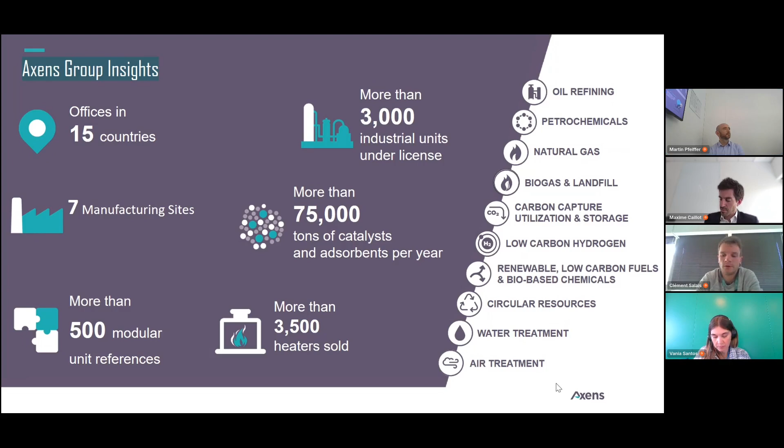Now let's jump to today's topic, which is the DMX process. Axens and IFPEN have been working on the development of this post-combustion carbon capture process using a cutting-edge solvent, which has the capability to demix under specific operating conditions of CO2 loading and temperature. The demixing is the separation of the solvent into two different phases: a CO2 lean phase and a CO2 rich phase. The CO2 lean phase will not contain the CO2, while the CO2 rich phase will contain most of the CO2. So now you understand the principle of the demixing.

Let's jump to the schematic on the left, which is the simplified PFD of the DMX technology. The flue gas which contains the CO2 that needs to be removed will enter an absorber countercurrent, and it will be in contact with a lean solvent, which will capture the CO2. At the top of the absorber, we have the treated gas from which the CO2 was removed, while at the bottom of the absorber, we have the rich solvent containing the CO2 that was captured.

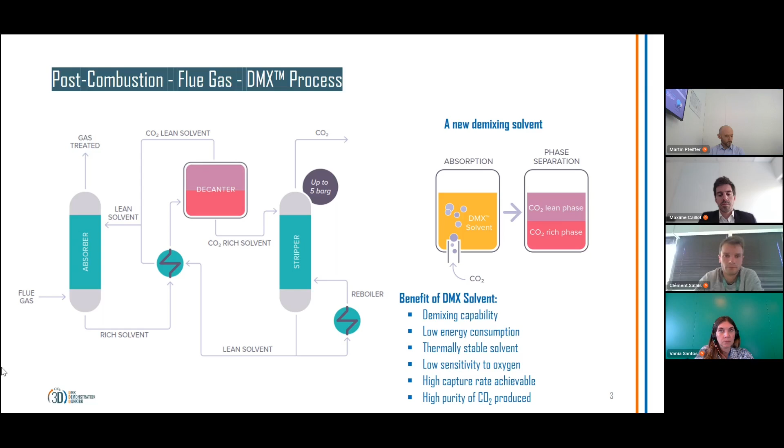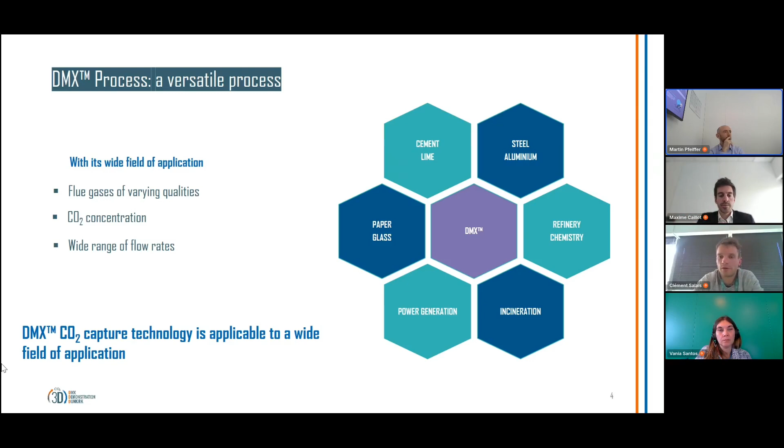The DMX process has been developed to be a versatile process, applicable to a wide field of applications with varying flue gas quality, a wide range of CO2 concentrations, and wide range of flue gas flow rates. So it can be applicable to many industries such as cement, lime, steel, aluminum, paper, power generation, and so on. In the end, DMX technology will be applicable to your own application, and you can see that the DMX process is applicable to any type of industry.

After this reminder about the DMX technology itself, let's move to the 3D project. As Thibaut mentioned, 3D stands for DMX Demonstrator in Dunkirk, and it's a project funded by the European Union. The purpose of this project is twofold. First is to demonstrate the technology itself, with the construction and operation of a demonstration unit, which has a capacity of 0.5 ton of CO2 capture per hour.

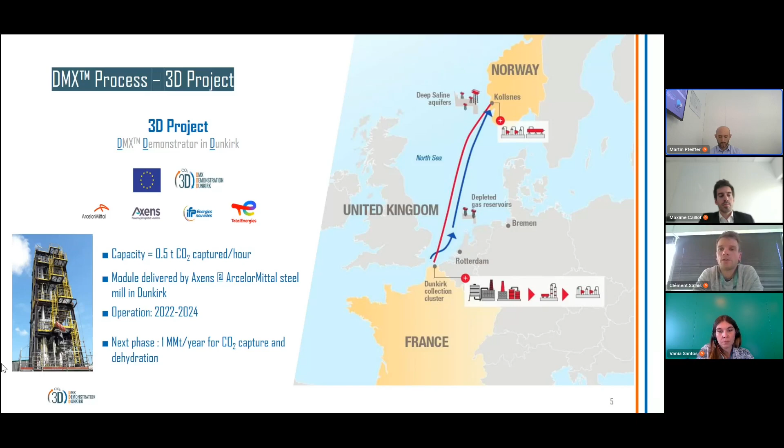This unit, which was delivered under module by Axens, is connected to ArcelorMittal's blast furnace gas network, and it's located in Dunkirk, in the steel mill factory of ArcelorMittal. This is the first objective, demonstration of the technology. The second objective is to perform a pre-feed of the complete CCS chain for a 1 million ton CO2 capture plant and CCS chain, from ArcelorMittal's emitting point toward the storage location in the North Sea.

So as I mentioned, the first objective of the 3D project is a demonstration of the DMX technology with construction and operation of this pilot plant. Construction started in 2019, and the pilot started up in 2022, and has been in operation for the last 2 years. It has a design capacity of 0.5 ton of CO2 per hour, and it will treat ArcelorMittal's blast furnace gas, with the possibility to tune the inlet CO2 concentration thanks to dedicated recycle lines.

The second objective is the pre-feed of a full carbon capture chain of 1 million ton CO2 capture per year. The first point will be to design a DMX unit for this 1 million ton CO2 capture per year capacity, which is what we call work package 3 later on. As part of this pre-feed, we also have heat recovery from the steel mill plant, CO2 conditioning and liquefaction, CO2 transport to the North Sea offshore storage location, and social acceptability of such a project.

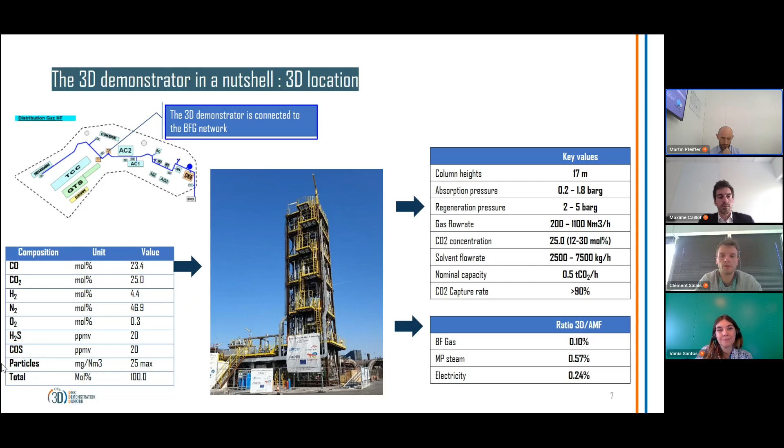The CO2 concentration as per design is 25%, but with some dedicated recycle lines, we can vary it between 12 and 30%. The solvent flow rate has a range between 2.5 and 7.5 tons per hour, and the nominal capacity of the plant is to capture 0.5 tons of CO2 per hour, with a capture rate higher than 90%.

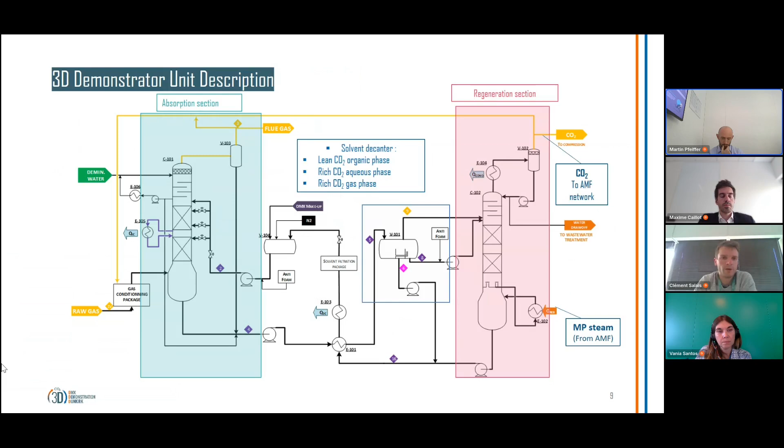Now let's go more in detail about the demonstrator itself. There are three main sections: the absorption section, where the flue gas is in contact with the lean solvent. This is where the absorption will take place.

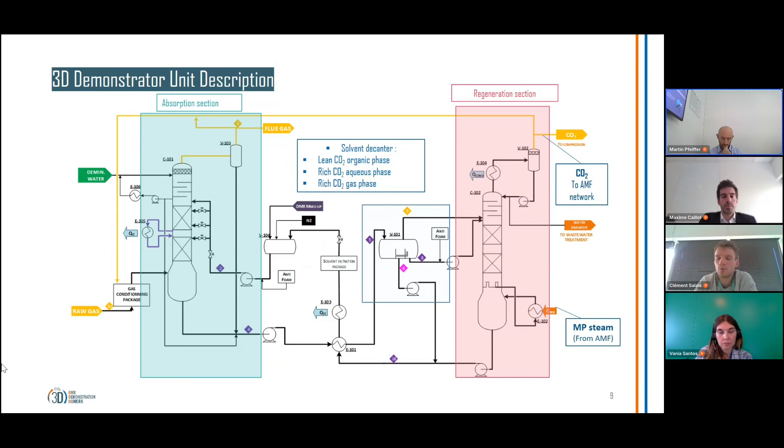There is the decanter, where the demixing will occur and will produce the lean CO2 organic phase and the rich CO2 aqueous phase. On the right side, you have the regeneration section, where CO2 will be produced and routed to AMF network. AMF stands for ArcelorMittal France. And as an input, we have some MP steam from AMF as well.

As part of this R&D demo plant, there are several features which are key for the demo plant. Upstream the absorber, there is a gas conditioning package for filtration and pressure and flow rate control. As the absorption reaction is exothermic, we provided a solvent intercooler in order to maximize the absorption capacity.

This means that we withdraw all the solvent at the middle of the tower, we cool it down and we re-inject it. At the top of the absorber, there is a dedicated water wash section to limit solvent and VOC emission.

For this pilot, in order to test the impact of the packing height, we have the possibility to inject the solvent at different packing heights. That's why here you can see that we have multiple injection points to the absorber.

There is a simple heat recovery for this pilot with a lean-rich solvent heat exchanger. It means that the cold, rich solvent is heated up by the hot lean solvent before being routed to the decanter.

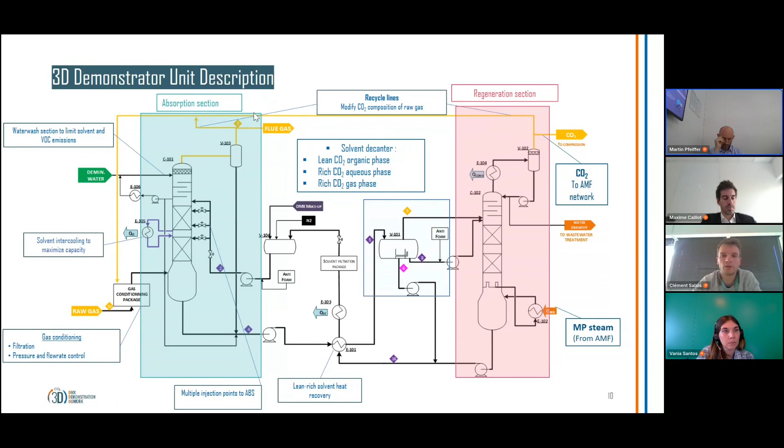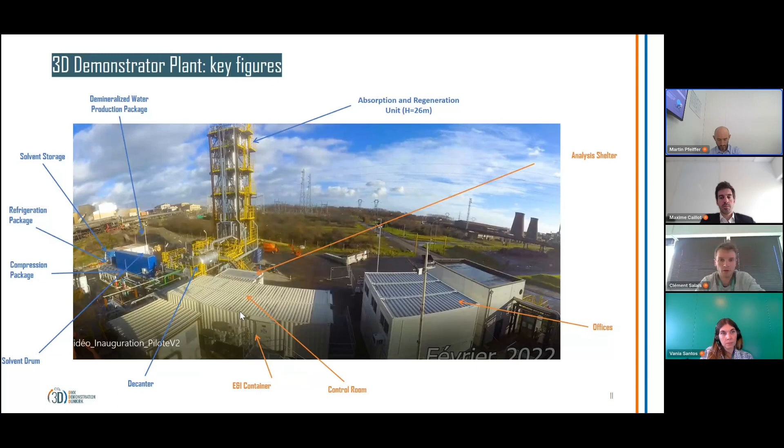So this will give you a nice overview of how big a 0.5 ton per hour CO2 capture plant is. So now let's move to the results.

The purpose of this demo plant is to demonstrate that the technology operates well, and to provide solid evidence that will answer all the challenges we are facing for industrialization of the process. We'll look at process operability, energy penalty reduction, solvent degradation management, solvent and VOC emission at the top of the absorber, the purity of the produced CO2, R&D data production, as well as corrosion impact.

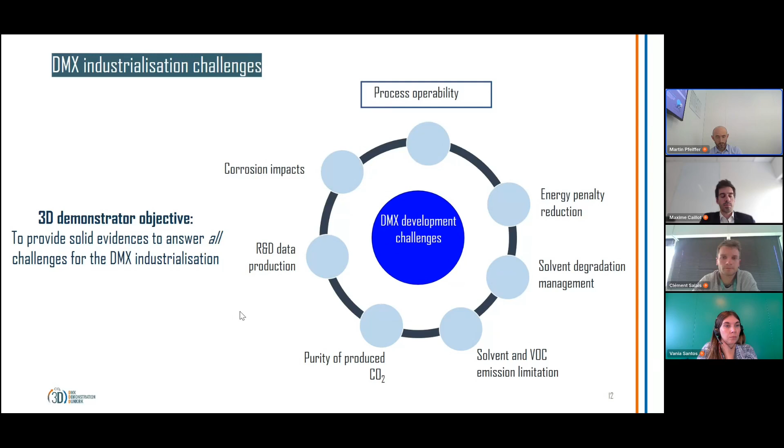First, let's start with process operability. We can definitely say that after 2 years of operation, we successfully operate the DMX process using a demixing solvent. We did not observe any solvent foaming in the columns. We have not observed any unexpected solvent composition deviation, and very importantly, the demixing occurred as expected in the decanter.

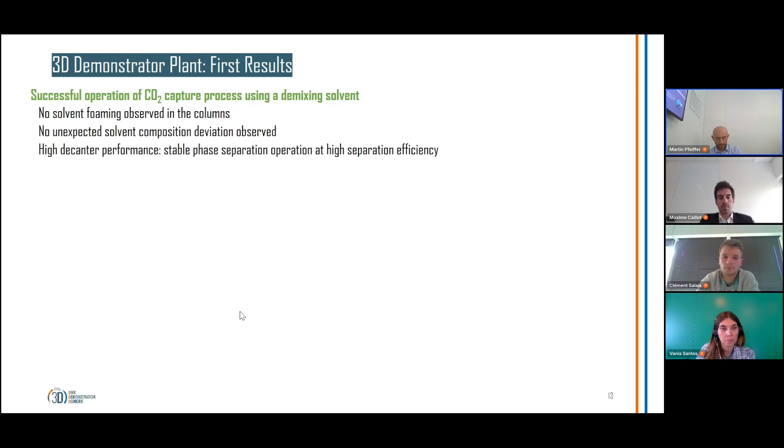In total, the pilot plant has been operated about 5,000 hours in capture mode, meaning with gas and liquid flow rate together. We have performed more than 100 parametric tests, varying the CO2 composition, temperature, pressure, gas and liquid flow rate, and so on, in order to accumulate data to test the behavior of the unit under varying operating conditions. All this information will be fed to our absorption model to make it more robust.

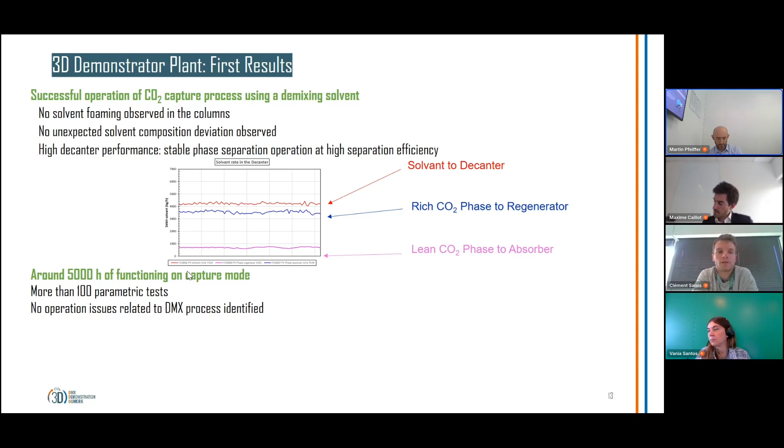We can say that during those 5,000 hours of operation, we have not observed any operation issues related to the DMX technology itself. However, we had some small operation issues not directly related to the technology itself, but to the design of the demonstrator. For instance, we had several loss of measurement in the column, which led to some trips, related to the level indicators. Or we had some limited capacity of the gas filtration in the compression package, which also led to some trips, but these are not related to the process itself.

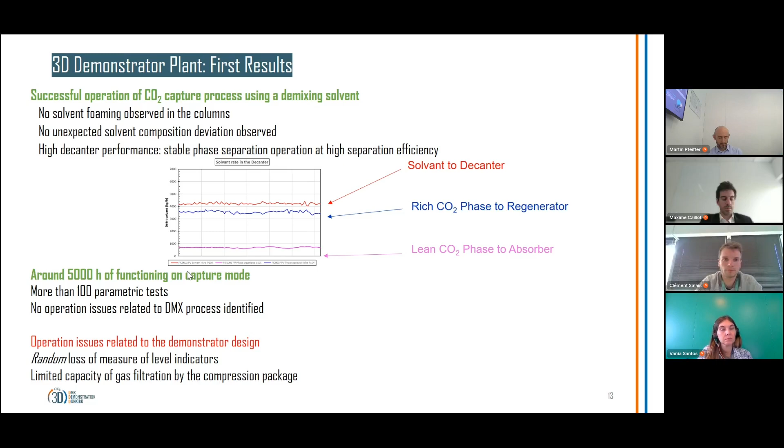So what did we test during those campaigns? As we said, we performed more than 100 parametric tests, testing different CO2 partial pressures, which represent different types of industrial applications. We performed some tests at 0.15 bar CO2 partial pressure, in order to simulate coal power plants with 12 to 15% CO2.

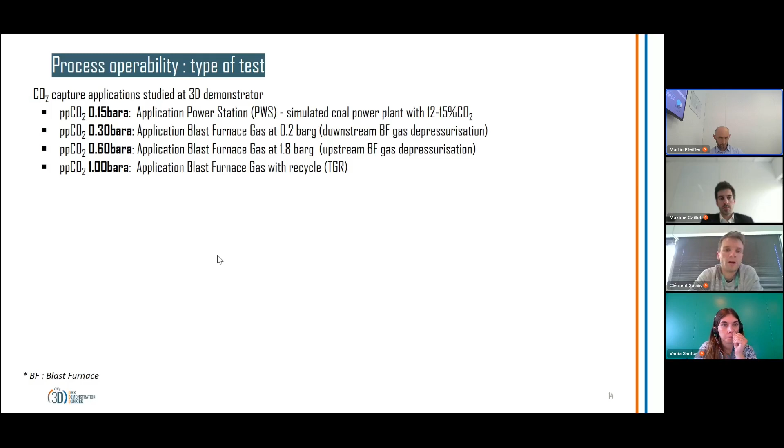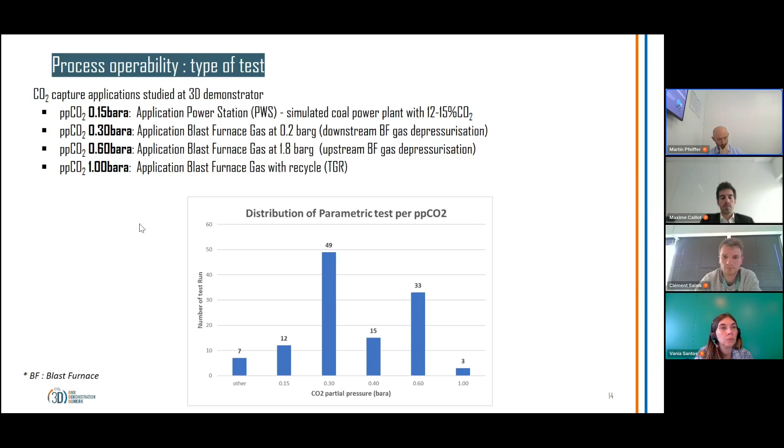That covers the process operability section. So let's move to the energy penalty reduction now.

On this graph, I plotted the energy penalty with a 100 basis as a function of the CO2 partial pressure for some different tests that we performed. We can see a decreasing tendency when we increase the CO2 partial pressure. For instance, we have a 25% reduction of the energy penalty when we increase the partial pressure from 0.2 to 1 bar absolute.

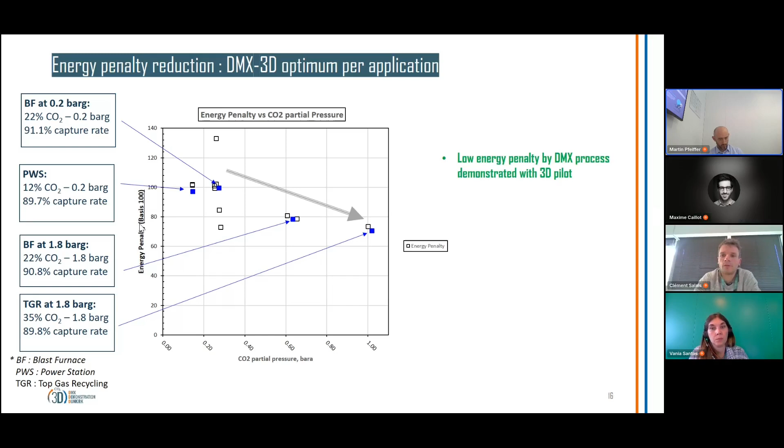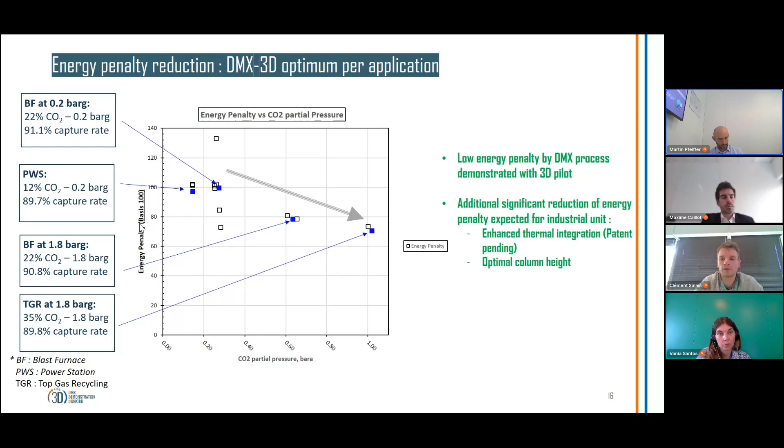So we have a low energy penalty for the DMX process, as demonstrated with the 3D pilot. For an industrial unit, when we go to industrial design, we will have additional significant reduction of energy penalty with optimized thermal integration within the process itself and with optimal column height. That covers energy penalty reduction.

Now let's move to solvent degradation management and what we observed in the pilot. As mentioned, we performed more than 100 tests, and for each test, we followed up the composition of the lean solvent by gas chromatography analysis, in order to measure the composition of unknown compounds in the solvent.

You have to keep in mind that at the beginning of the project, the solvent degradation target was to be below 5% of the total inventory per year.

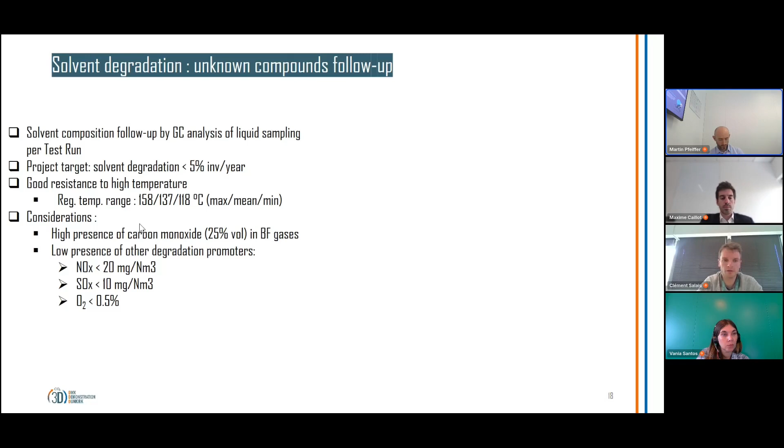During all these tests, the temperature at the bottom of the regenerator varied between 120 and 160 degrees, with an average of 140. Also keep in mind that for the blast furnace gas application, there is a high content of carbon monoxide, about 25%, as well as the presence of other degradation promoters, even in low quantity, such as NOx, SOx, and oxygen.

So on this graph, I plotted the temperature at the bottom of the regenerator, which is the hottest point in the process. You can see that the average temperature is around 130 to 140 degrees. These are the red dots.

And if you look at the black dots, it corresponds to the evolution of the composition of unknowns in the solvent. You can see that it has an increasing tendency starting from 0 and reaching 0.5% of unknowns after 5,000 hours of operation.

So we can say that we have at 3D a very low degradation rate, as we reach 0.5% of the inventory after 5,000 hours. And if we convert this into another unit, it represents losses due to degradation of less than 0.02 kilogram of solvent per ton of CO2 captured.

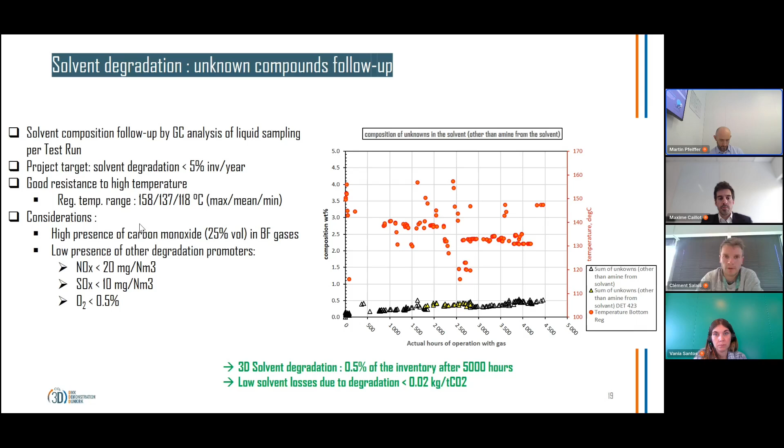So in addition to unknown components, we also monitor heat stable salt formation in the solvent. Here, differently, we perform analysis by ionic chromatography once per month on the solvent.

So we can observe that from the beginning we have formiate production, which reaches an equilibrium ranging between 1,000 and 1,200 ppm weight of formiate.

And if we perform a zoom on the y-axis, the graph below is the same as the one above, but zoomed between 0 and 100 ppm, we can notice that we also have a small formation of acetate, sulfate, and nitrates. But this remains very low and below 100 ppm after 5,000 hours of operation.

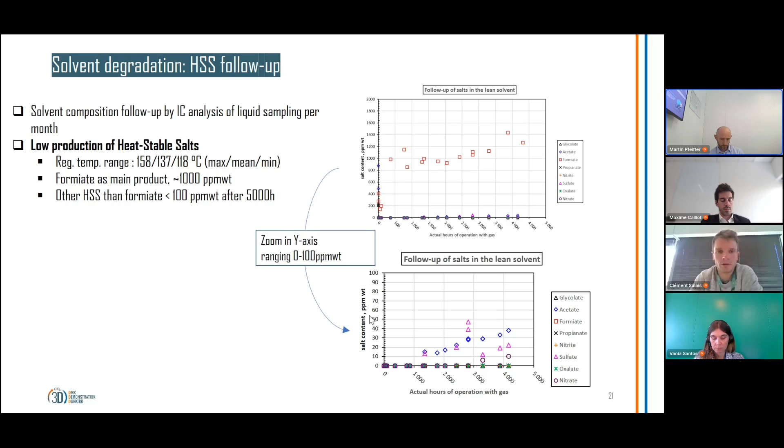So the degradation is very low and is under control. This is what we wanted to show you regarding the solvent degradation at 3D.

Now let's move to solvent and VOC emission. At 3D, we can perform online gas analysis with FTIR and micro-GC for the main products, the main components of the gases, but also we can measure NOx and SOx as well as VOCs.

Now I'll present the typical result we observe for the blast furnace application for the emission in the treated gas. We measure below 1 ppm of oxygenated compound in the treated gas, meaning at the top of the absorber. We did not detect any alkanolamines. Regarding the amines, we measure below 4 ppm of DMX, below 2 ppm of NH3, and below 1 ppm of other amines.

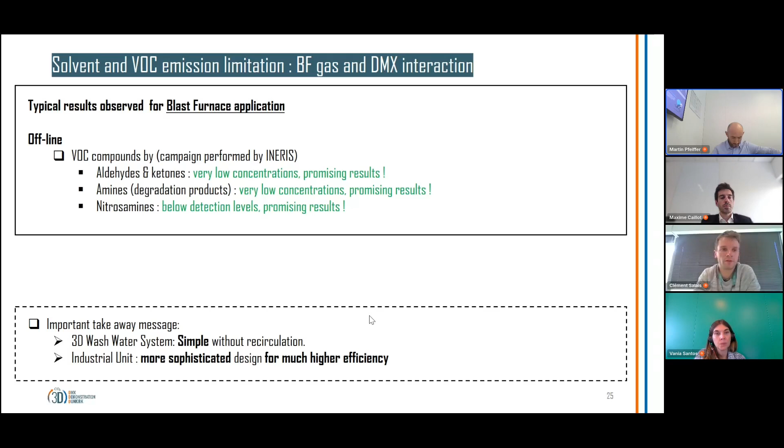Now let's move to the purity of the CO2. A very important question is, does the DMX process meet CO2 specification? As you know, the CO2 specification will depend on the storage site and transport strategy. For the 3D project, we looked at Aramis and Northern Lights spec.

Keeping in mind that the Northern Lights spec is very severe, for the specification we looked at inerts, presence of SOx and NOx, sulfur compounds, and VOCs.

So for the CO2 purity, we have in wet basis 99.1%, and we have a presence of moisture at about 0.7% under those conditions, which means after drying, after removing the water, we will definitely reach a spec of 99.8% in dry basis of the CO2.

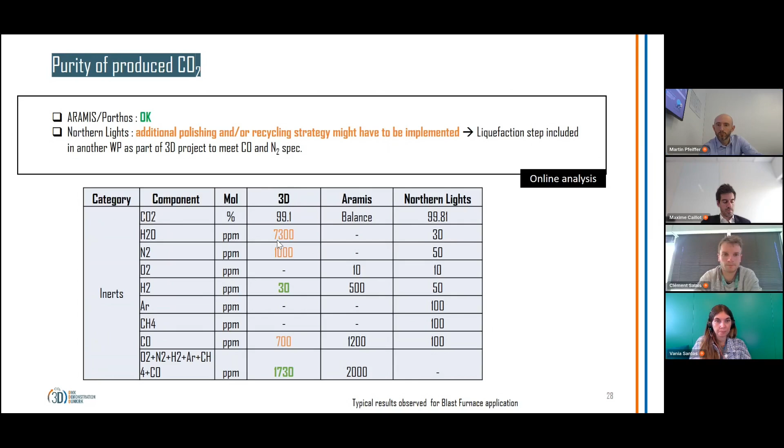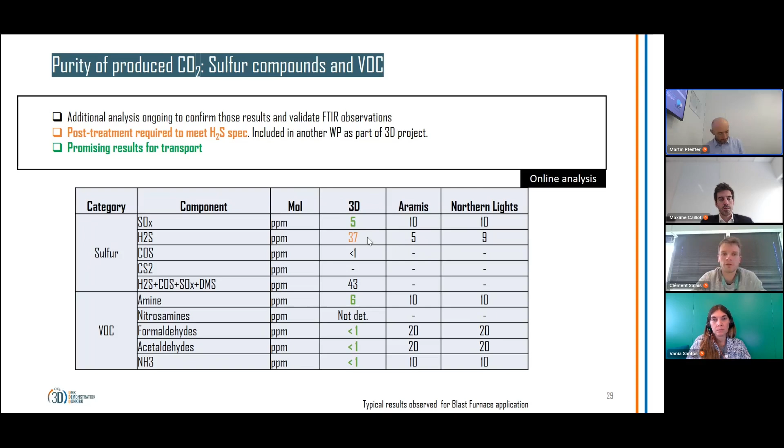And regarding VOCs, we don't have any issue with amine or formaldehyde and acetaldehyde, or NH3. So it's very promising results in view of transport and storage.

We can mention that at the outlet of the DMX process, we can produce CO2 with a very high purity, more than 99.8% in dry basis.

However, the specification for each project will depend on the storage site and the transportation mode. So you will need to adapt your conditioning unit depending on the specification you are targeting, keeping in mind that if your specifications are too tight, it will have a big impact on your capex and opex, and it could even jeopardize your project.

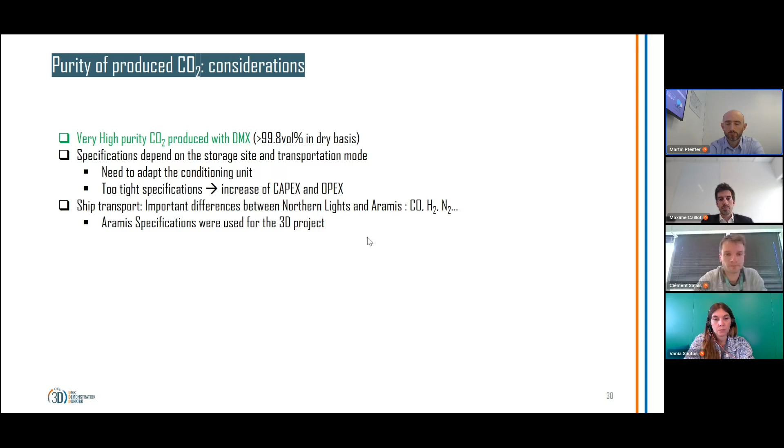So this covers the purity section. Let's move to R&D data production.

So as you all know now, at 3D we perform more than 100 parametric tests in which we modify the different operating conditions, CO2 composition, temperature, pressure, flow rate, and so on.

And for all those tests, we perform consolidation and reconciliation of the mass balance in order to be able to accumulate a lot of information about those tests and feed them to our absorption model, to continuously update it with all the 3D consolidated results, which allows us to have a very strong and robust simulation tool. So I would like to thank IFPEN for their hard work on that, to provide Axens a robust simulation tool, which will be used for industrial design.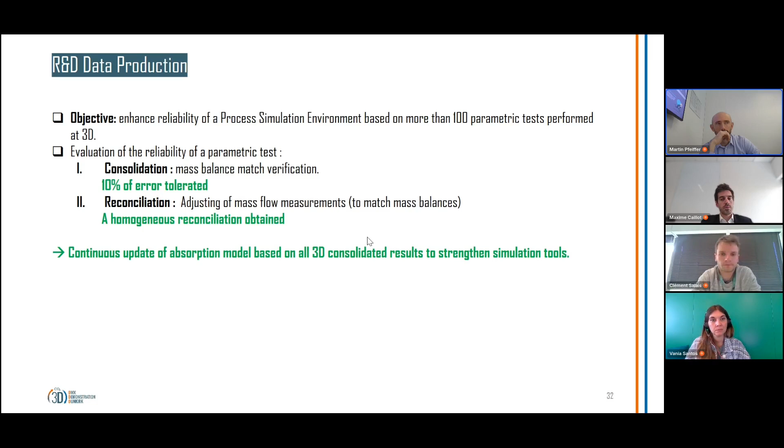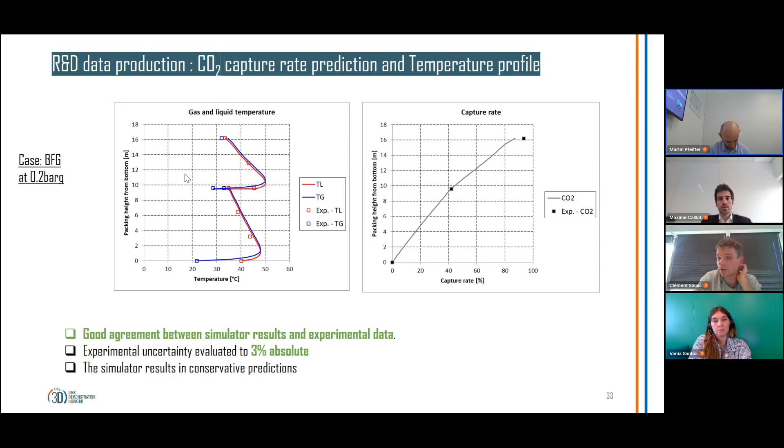And now if I plot the same graphs for another application, blast furnace gas at 1.8 bar gauge, again the temperature profile along the absorber is a good match between simulated data and experimental data, and also the evolution of the capture rate.

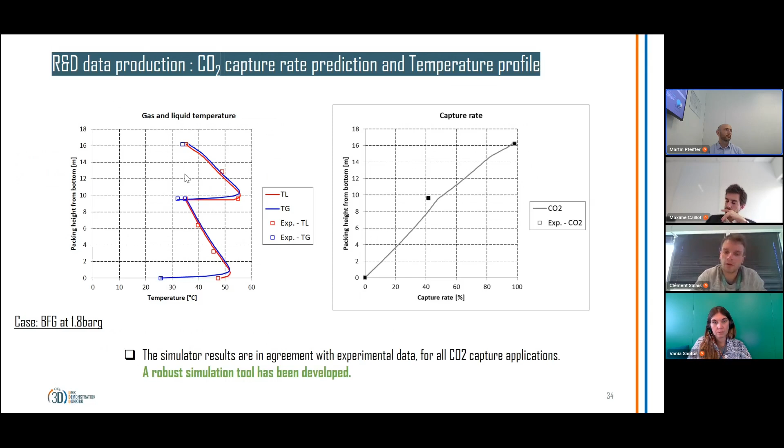So again, we can mention and conclude that the simulator results are in good agreement between the experimental data and the simulated data, and this for all CO2 capture applications. So now in Axens, we have a very robust simulation tool in our hands to perform designs for industrial applications.

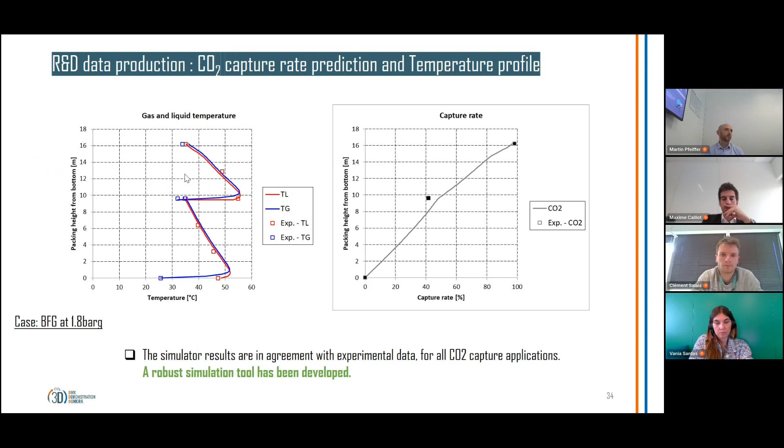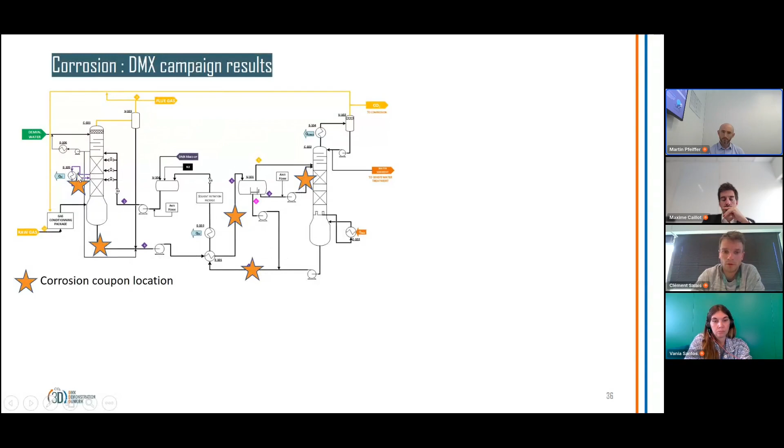solvent, and also at the semi-rich in the intercooler. All these coupons were in contact with the solvent for more than 4,500 hours of operation. And the conclusion is that we have a very low corrosion rate for carbon steel, below 5 microns per year, and almost no corrosion

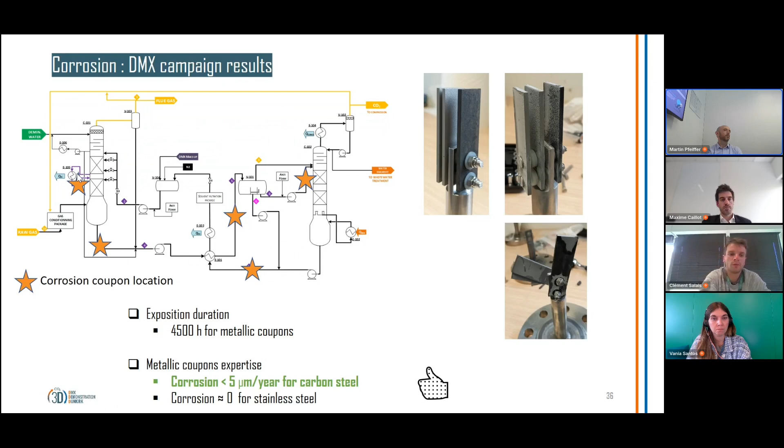for stainless steel, which confirms our material selection strategy to have part of the unit in carbon steel. Whereas, for instance, if you have an MEA process, all the equipment will be in stainless steel.

So this covers all the main challenges. Thanks to the 3D pilot, we have been able to check, analyze and overcome all the DMX development challenges. That's how I've presented it to you.

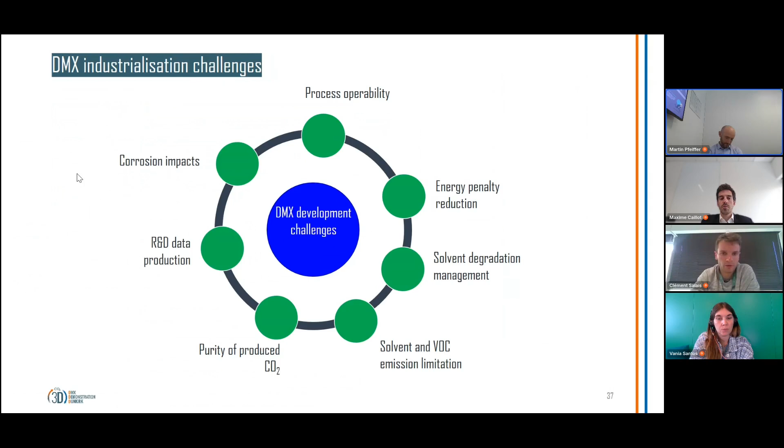So now let's have a few words about the industrial unit. As part of this 3D project, Axens designed a DMX process for ArcelorMittal for 1 million tons of CO2 per year.

We did the first design in 2021 based on our knowledge at the time. And as part of the 3D project, it was foreseen to have an update of this case, which we call work package 3, based on the outcome of the demonstration.

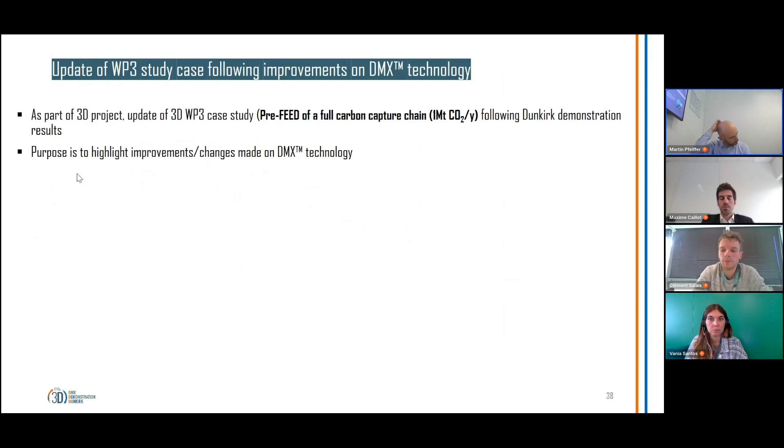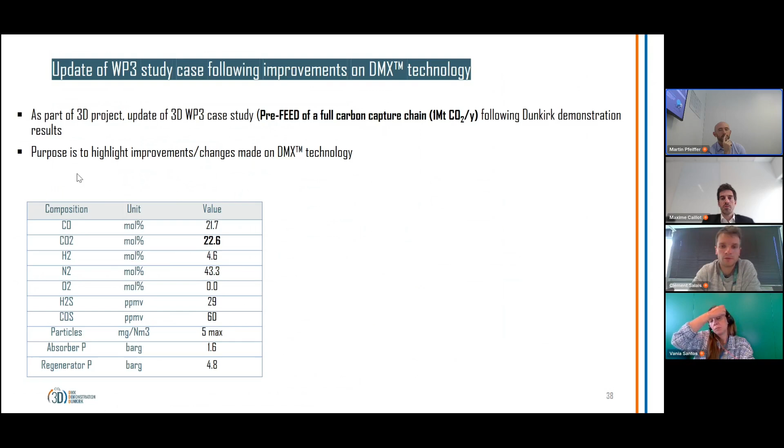So in 2024, we did an update of this work package 3 in order to highlight improvements and changes made to the DMX technology based on our knowledge in 2024. Here I remind you quickly what the design values are for this case, which is very similar to the composition for the design of the pilot.

And regarding the improvements we made for the work package 3 update, of course we used the updated simulation model given by IFPEN, which was updated based on the demonstration results. We proposed an optimized scheme regarding the heat integration.

We optimized the absorber design with 2 intercooling steps and also with a higher packing bed in order to reduce the solvent flow rate, which helps us downsize the regeneration section and minimize the size of the decanter.

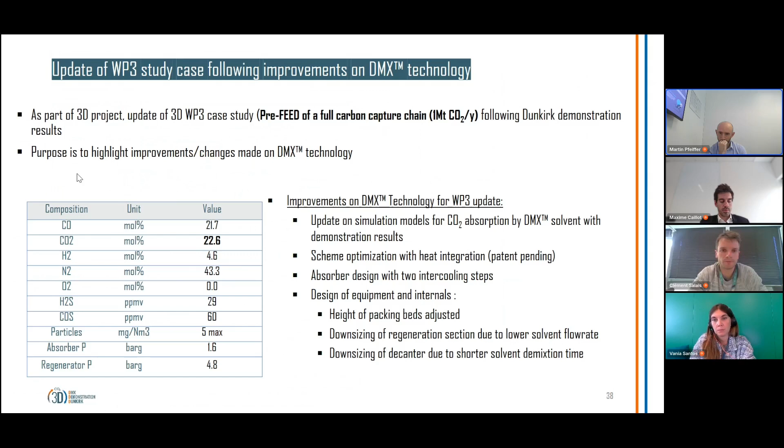Now we'll give you some comparison results between the 2021 case study and the 2024 update. We can see that we have a decrease in energy consumption by 28%. We managed to reduce the solvent flow rate by almost 40% for an equivalent capex. And the OPEX is also decreased by 40%.

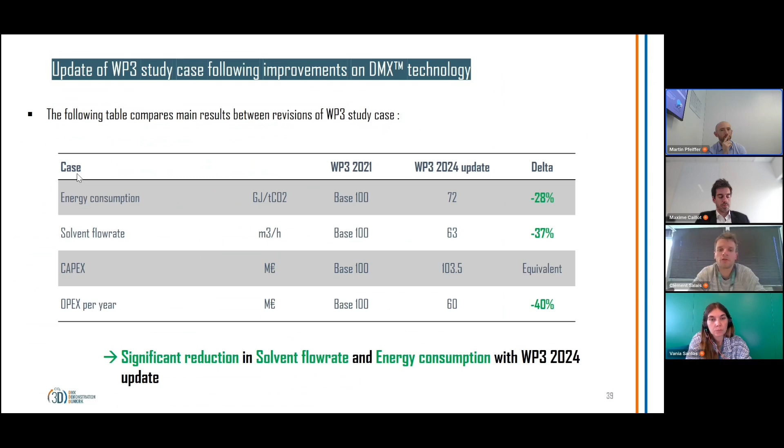So with this 2024 work package 3 update, we have a significant reduction in solvent flow rate and energy consumption.

So now it's time for the conclusion. We can definitely say that we have a successful operation of the DMX process at Dunkirk. Using a demixing solvent, the energy penalty at the pilot matches the initial target. And beyond that, we can have a significant reduction of energy penalty for the industrial unit using

an optimized, heat-integrated scheme with an optimal absorption height in the absorber. As you have seen, the DMX solvent has good resistance to high temperature

and leads to low production of HSS, so the degradation of the solvent is under control. We have very low VOC emissions in the treated gas. The DMX process allows us to produce very high purity CO2, and there is no trace of corrosion for the

metallic coupons. And last but not least, thanks to the hard work done during these 2 years of operation, we now have a good simulator coupled with high reliability of experimental data, so we have a robust simulation tool in our hands in order to perform any design for you.

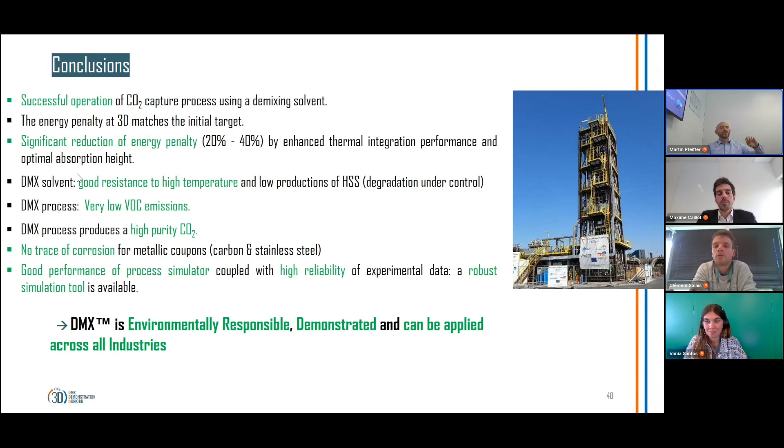So now we can say that DMX is environmentally responsible, demonstrated, and can be applied across all industries.